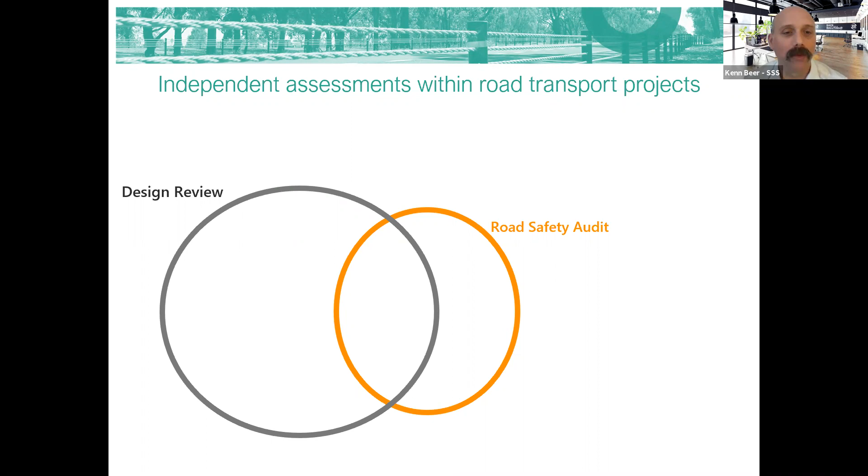The other thing that's important to remember, which is a really important injection of safety into a road transport project or an independent assessment of other features as well, is that design review. And there is overlap between the road safety audit and the design review, but there's certainly stuff in the design review which is not picked up in a road safety audit: conformance with different standards, checking, drainage calculations and all those wonderful things. And that's another important process. There is overlap there, and there's stuff that a road safety audit does that will probably not come into a design review.

And our safe system assessment, again, has overlapping parts. There is quite a bit of overlap between what you'd find in a road safety audit, what you'd report in a road safety audit, and a safe system assessment. But there are certainly things that a safe system assessment looks at and reports on that are not covered in a road safety audit. And you can see there that there's a little bit of design review stuff in there as well.

Then we've got safety in design. So that's one to check, can this be built safely? Can it be managed safely? Can it be decommissioned safely? So that's another beast, another independent assessment in there.

And then there's this sort of DDA compliance, the Disability Discrimination Act, checking the tactile ground surface indicators are in the right spot, the grades are right, and all of that sort of stuff. So there's quite a few of these independent assessments within road transport projects, and those are certainly embedded into your processes with any transport project at TMR.

And so I just thought I'd start with that to show some of the overlap, but also show some of these areas that are outside. And certainly one thing that I've found as I've been doing a lot of safe system assessing over the years is a lot of people say, well, we've done a road safety audit, so we don't need this safe system assessment. And well, you're covering off some of the stuff, but as you'll find out, there's a lot more to it.

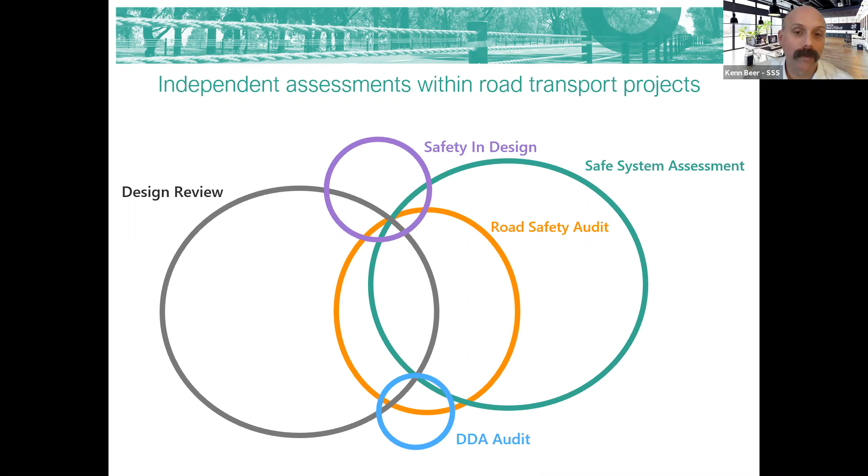Remember to jump in with your questions as we go, but that was just a little context setting slide I wanted to put up first. But really, we're jumping now into module 1, and I've got quite a few things to cover before I ask you some questions.

So by the end of this module, we want you to be able to list the principles and the elements or pillars of the safe system, determine kinetic energy thresholds for key crash types, explain the differences between traditional approaches to road safety and the safe system approach, cite best practice for behavioural change and vehicle interventions, and give reasons why speed is a critical element of the safe system.

So there's a fair bit to cover there, and some of those you might think, oh, well, I know that, but I may give it a different slant to the way it's been presented to you in the past. And I'm also keen to hear your thoughts on some of these and gather that information.

Okay, the safe system. This is a road safety philosophy, or actually an operational philosophy of a road network or transport system that we've committed to. We've committed to in state strategies or state policies, in national strategies, and even at a UN level, we committed to the implementation of the safe system. So we're in, TMR's in, absolutely committed to the implementation of the safe system.

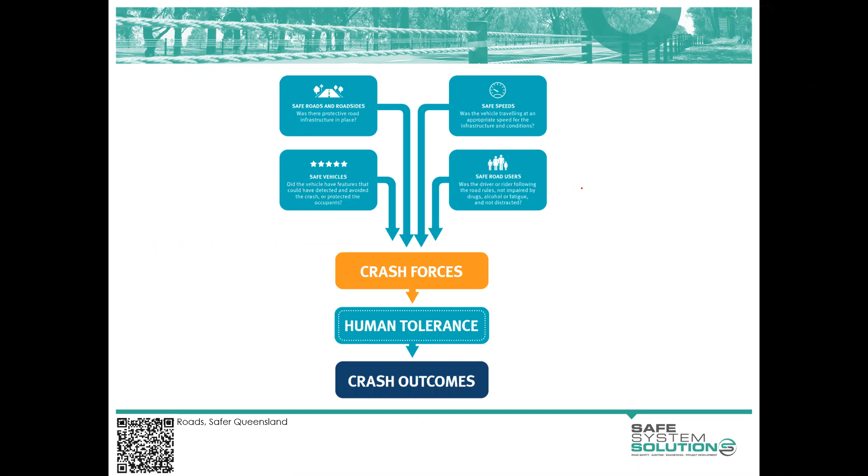The fifth element, the acknowledged fifth element of the SAFE system is post-crash care and emergency response. So how quickly and how efficiently we can get to injured parties in a road crash, how efficient and advanced is our medical system to treat them. And that's because you remember the diagram basically said fatalities and debilitating injuries.

There is your golden hour rule, and when you talk to the trauma surgeons, they're very adamant that if they can get there with early intervention, they can make things that would be acquired brain injuries into lesser and much lesser injuries that people can have a full and healthy life with. They can do some wonderful things. So we acknowledge that as an element of the SAFE system.

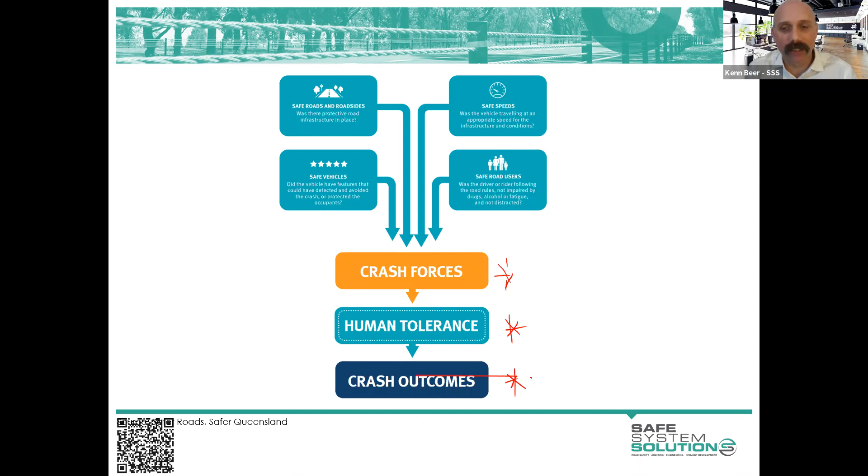This is another little diagram I love that came out of TMR, and it's just another representation of the SAFE system using those elements that feed into crash forces, human tolerance, crash outcome, right? And that's to say we've got this complex mix of things going on out there in our road network. And when an incident happens, we need to understand the forces. We need to check the forces against what the human body can handle. Then we know our crash outcome. And if the crash outcome is fatal or serious injury, like debilitating injury, we need to go back and look at these elements and say, hang on, we haven't got our system right.

So crash forces, and look at it. This is straight out of your documentation. Look at it. It's the orange. It's the bright color. Crash force. Not saying how do we stop crashes, but saying what are the forces in these crashes, and that is one of the most fundamental changes between the way we've traditionally operated in terms of road safety and how we're moving in the SAFE system, the acknowledgement of crash forces and human tolerance to physical force.

So we're going to do everything we can to try to minimize crashes. We're not ignoring that, absolutely not. But we are just acknowledging that we need to design our system for humans. And they're fallible and they're going to make mistakes. And we need some fail-safe mechanisms. So when people fall asleep at the wheel, or when they do things that we don't condone, don't want them to do, like use their mobile phone, or have a few beers and get in the car, or have a few beers and stagger out onto the road.

How is our system going to protect these people and others that are in that immediate area? And that's confronting, isn't it? Because you're saying, well, hang on a second, if these people can't behave themselves, why is it our responsibility to protect them? Well, the reason is you are managing a road network for society. And that is our responsibility. They have a responsibility as well to do the best they can, but it does not void us

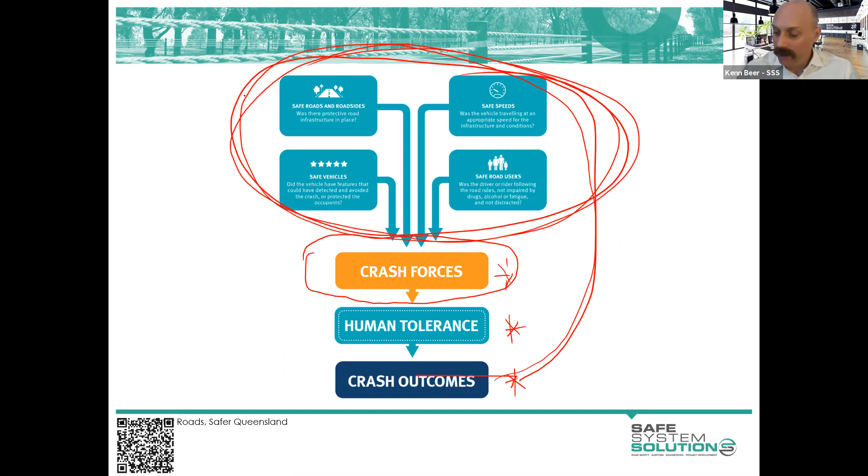So I wanted to use a different analogy on this. And I want to get out of the transport field for a second, because we've grown up with roads. We've grown up walking and then riding or whatever you're doing, and then driving around these networks, and then managing it, designing it, maintaining it, whatever your role is. And we've sort of developed in our mind a safety culture, the way that we think about safety and roads.

But if we look at another industry and we try to say, well, what is their safety culture and how have they got there? I think it sort of opens up our mind to reassessing how we've established our thoughts on transport. So let's look at manufacturing. Let's look at widget production. I don't know what widgets they are. They're widgets.

There was a time back there in the early days, and this is where the widget factory was actually a fairly open system. Because immediately when I say widget production, people just go, yeah, it's a closed system. There's so much freedom out there on the road network and people accessing it all the time. This is not a good comparison.

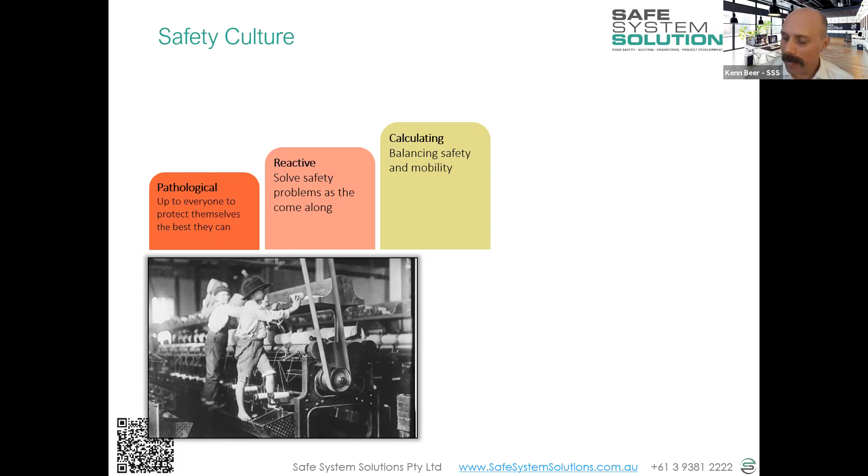And then it sort of elevates from there to this idea that safety sets the precondition for widget production, in terms of saying that we need an extremely high level of safety, and we will produce as many widgets as we can up to that level of safety. But that is dictating. And it's very accepted in occupational health and safety in factories and the like, an absolute zero for death and serious injury, right? And people are like, yep, absolutely, right?

And the safety culture is such that it says, if there is something that poses a potential death or serious injury, production stops, right? And they say, we have to fix that before we restart our widget production. And so we see the machines, and they have cutoff switches and guards and all sorts of things beyond simply the training of the people using the machines. It's quite a sophisticated safety culture system in most of our factories in Australia, at least. Some of the rest of the world still has some work to do.

But you can't stop there. You need to continually invest in maintaining that high level of safety, the culture in terms of the facilities, but also the people and the machines and the like. So that's sort of the safety culture in the widget production sense. But safety culture is safety culture across the board. So this applies equally to our road transport system in the design, the development, the delivery and the management of our transport system, our road system.

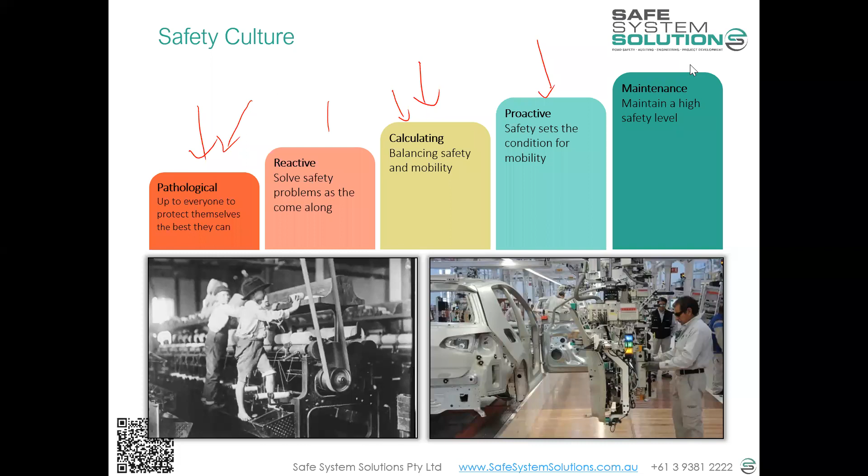Thank you, Kenn. We've got 100% of people have voted in the poll. So that's great news because that means it's working and everyone's here. So I'm not sure if you can see that. Can you see that? I can see it. Okay, great. And I assume everybody can see it.

robots or the like. Well, maybe that's another area, but for pretty much all of our careers, we'll be still dealing with humans in control of the system. And what we want to do is manage mistakes, minimize and manage. No mistakes is just not an aim of the SAFE system, because it's not real.

We'd love no deaths or serious injuries, and in fact, that is an aspiration under the SAFE system, and we're aiming at that. We know the human tolerance to physical force is a key principle. We know that people make mistakes, and we've got to factor that into our design, decision making, our operational decision making, and there is a shared responsibility which we're looking at.

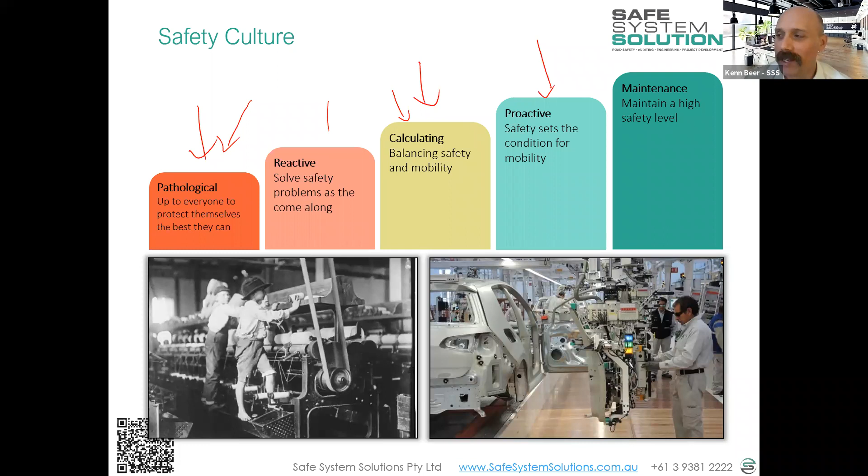There's Usain Bolt, the Hulk of a human. He's up there because this is our total population, and that's his running speed. So there's just a little bit of an indication of, you know, pick any of us mere mortals up, and we'd be less likely to survive crashing at that 44 kilometers an hour than Usain Bolt would.

There's a little video I've popped in there of the guy hitting the pommel horse. It's in your memory stick, and it's on Moodle, so you can have a look at that. He survives, but that's the kind of forces that we can handle. I'm going to jump on from that.

We also have this data not just for those pedestrian crashes, but we have this information for some other crash types. So this one is a right angle crash. You know, common people would call it a T-bone crash. But we have this vehicle here is what we call the bullet vehicle. The one that does the striking is the bullet vehicle, does the damage. In this case, this is the target vehicle. The target vehicle is the one that gets struck, or the occupants that receive the damage.

Now, this graph is the speed of the bullet vehicle and the injury or death probability to the occupant of the target vehicle. And we see there that around the 40 kilometers per hour of bullet vehicle speed, it's very likely that the occupant will survive. Up around the 80 kilometers per hour, we're in the territory of highly likely to result in fatality to the occupant of the target vehicle, sorry, I should say. And around the 50 kilometers per hour is where it really starts to exponentially kick up.

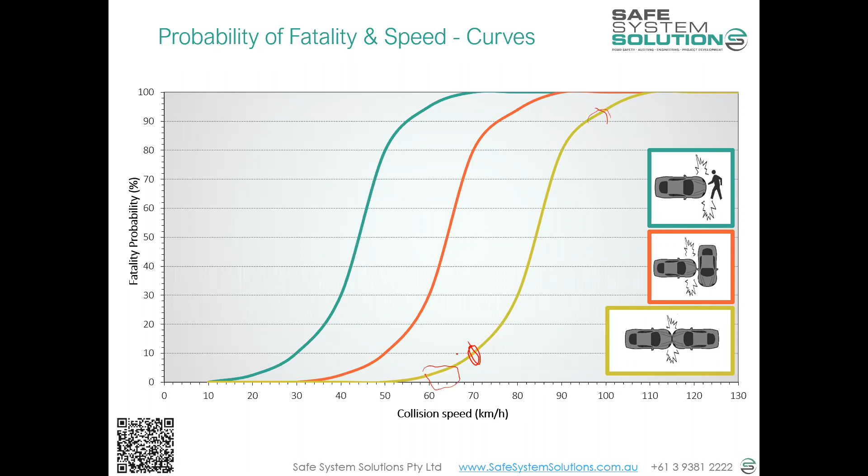We certainly can, Kenn. A question came through: is the collision speed the total of both participants or the speed of each? So the collision speed, in the head-on, it's just the speed of each. So there would be 70 and 70. And this one is the bullet vehicle speed only. So this vehicle could be coming out of an intersection or something quite slowly, or could be going along quite fast, but it's that instantaneous hit. Now, there are some complex vectors associated with this, and it slightly varies a few things. But in general, that's what it is. So that's a good question, though.

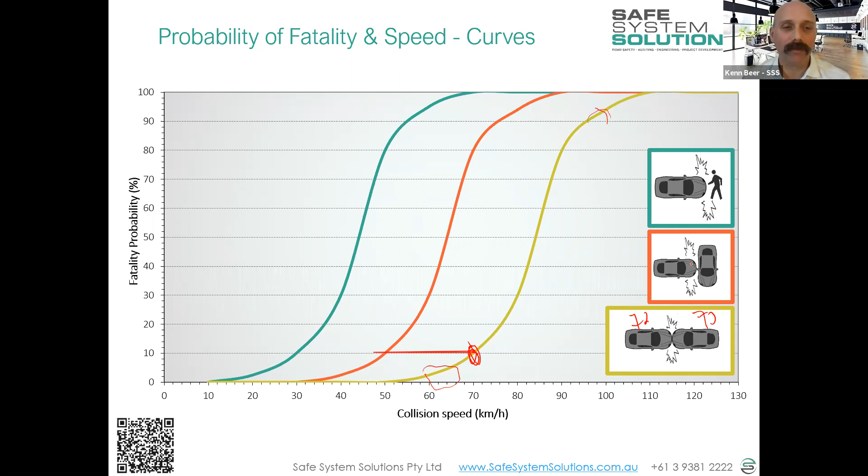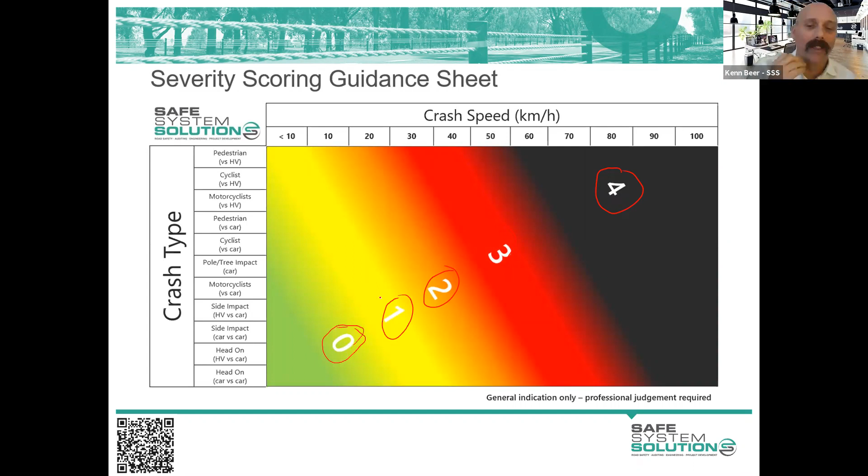That's sort of how it graduates up. And in fact, we use these numbers in a scoring system within a safe system assessment. So you'll probably, I hope, be referring back to this and saying, I'm worried about a car side impacting with another car at 40 kilometers per hour. What sort of severity score should I give this?

And you could say, well, side impact car to car, so come up here and somewhere. Okay, we're talking 3. So, not in the absolute end, and there will be some of them that will be survivable, but there's still potential for some pretty serious stuff there.

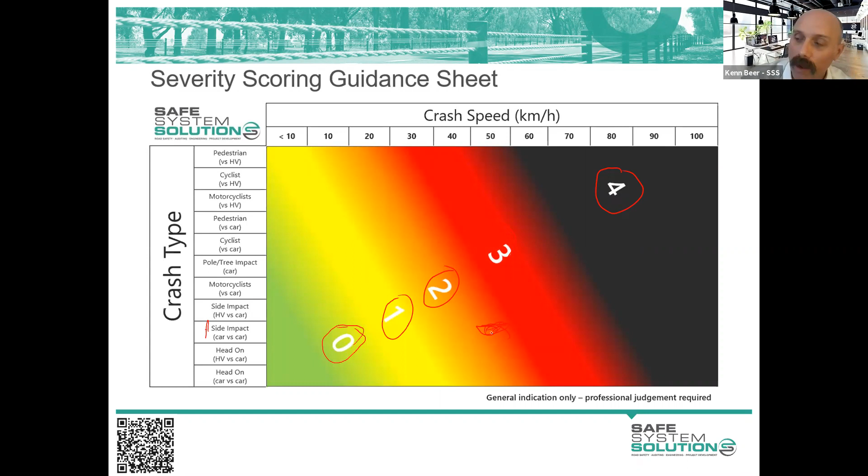All right, I'm going to keep moving on, Kathy. But good, thank you for these questions. It's really great, and getting involved in these different things that are coming up.

And these crash causation studies are done almost like clockwork. Every 10 years, there's a new crash causation study done around the world that's the world's biggest crash causation study. So they're taking 5,000, 10,000 crashes and analyzing them, and they go, this is the cause of these crashes.

And they pretty much always come back with somewhere in the order of around 90% of the cause of crashes is road user error: driver error, pedestrian error, motorcyclist error. Then we've got the roads playing a role in interacting with that sometimes, or the road being the actual feature that's been the major cause of this crash, vehicles even smaller than that.

Now, the reason this is the bane of my existence is not because it's wrong. I don't dispute any of this research. I think it's very sound research, well done, comprehensive, massive studies. The issue I have with it is where people take this information, and it reinforces to people that we should be fixing the road user.

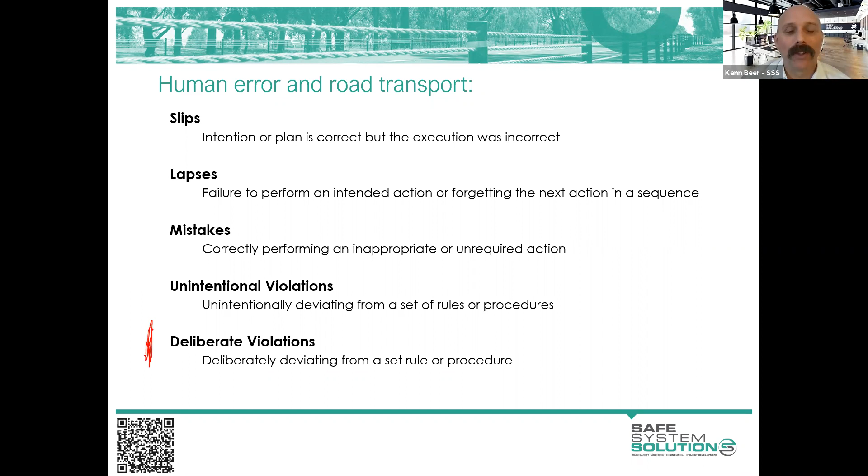All right, enough out of me, Kathy. Let's do a little exercise. Yes, please, Kenn. We've got about 40 minutes to go.

All right, so the poll should be popping up on your screen, and what we're doing is a mix and match here. Basically, we're saying the traditional way of thinking, before the Safe System, was victim blaming, and what we're trying to move to is one of these other ones. Now, some of them could go to any one of these. But if you scroll down through the questions, you'll be able to get a few quickly and answer the others. What we're looking at is how we have traditionally approached road safety, and where we are moving to with this idea of the Safe System. What are we trying to achieve? Not to say we're there yet. We've got a lot of work to do, and it's going to take big change.

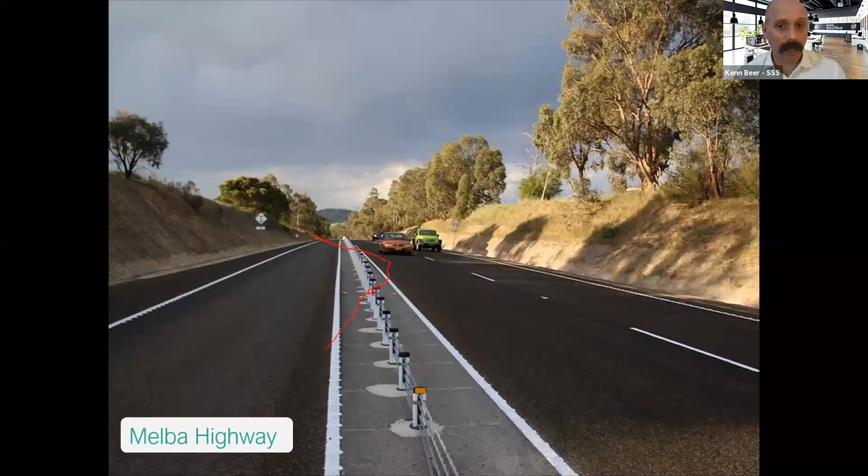So those of you who know a wire rope system and how it operates, a vehicle hits the wire rope and the wire rope posts break away, and the wire ropes absorb the energy and bring the vehicle back. And we know that there's a deflection zone behind those, and we make sure we've accounted for that within the design of the barrier system. Now this one, as you can see, in a cutting, some challenges there in terms of widths and how this all plays out. And the median width there varied, went down to 1.4 at some spots, and it's 2 metre or 2.2 at a lot of other spots. But nonetheless, certainly we know the wire rope would deflect into that oncoming lane a bit.

Now, that then, I reckon it added at least a year, if not more, to this project as the design committees debated this. Well, it doesn't meet the requirements, and people were very adamant: standards say this, must be this, we don't have the deflection zone, can't do it. And then a lot of us in there going, well, our options here are to blast out or cut this batter back or compromise other areas. And there was quite a risk analysis done and all sorts of things.

But what happened is that people couldn't see that the barrier system, even operating a little bit less, like deflecting a little bit into that lane, is so much better than just a white line, which is currently what was there.

And that we should be trying to eliminate as much of the risk as we possibly can. The reason I bring it up is this sort of reverting back to a standard without stepping back and looking at the overall safety of this.

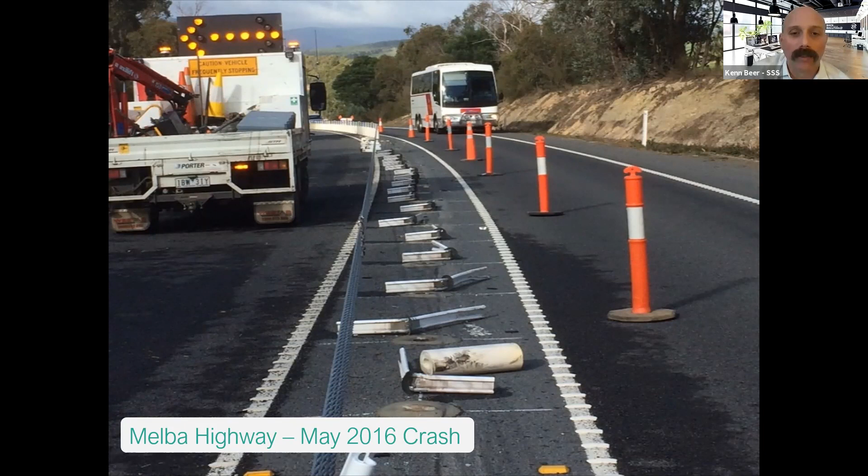Yeah, so certainly you'd eliminate your deflection issues with a concrete barrier, an F-type or the like. The severity to the vehicle occupants would be much worse. So we get around a 40% reduction in fatal and serious injuries with the implementation of a concrete barrier system, and we get about an 85% reduction with a wire rope safety barrier system.

The reason for that is, people probably have this vision of people crashing into the barrier systems as they drift off, and they hit it at a nice shallow angle. The mechanics of a crash are actually, well, a lot of crashes are a lot worse than that. There are some that do that. A lot of crashes are people leaving the road to the left, overcorrecting, and shooting at a pretty harsh angle at the barrier. So the flexibility of that barrier system becomes integral to the severity outcome to the occupants of the vehicle. And hitting a concrete barrier, the severity is much worse.

The cost would be more as well, probably, for the concrete system, but you would avoid some of those other challenges. But good point, and there are situations where you would use concrete, absolutely.

Okay, I'd like one last question. Did the operating speed change? That's a good question. I would have to relook at that. I would imagine it did. It came down a little bit. It has in other circumstances where you put something in that closes that envelope of a road, narrows it down. You traditionally see a lowering in operating speed, but I can't hand on heart say for this road that it actually occurred. But yeah, they're great questions, Kathy.

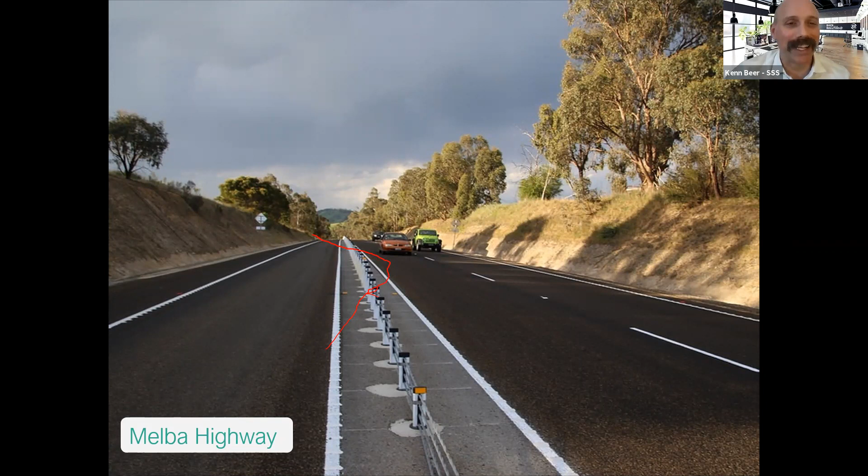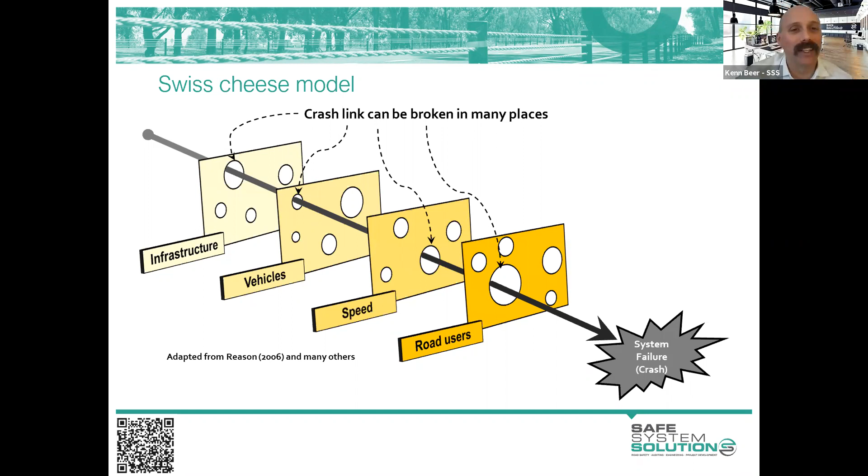All right, I'm gonna go a bit fast here, so put your seatbelts on. I'm gonna just cover off a few things in safer road users, safer vehicles, and safer speeds. Speed's something that's going to be continuing on throughout all of our modules. Road users and vehicles, really, we don't have a huge amount to discuss after today's module.

But the reason I want to do that is twofold. One being that road safety practitioners, or people even just managing a road network or being involved in that, should have an understanding of some of those other behavioural aspects, so when you're at the barbecue and you're talking to people and they find out you work for a road authority, you can dispel a few myths. But also within a safe system assessment, if you're doing full safe system assessments, you are not just looking at the speeds and the infrastructure.

You're also looking further and broader than that, associated with things to do with behaviour change interventions and vehicle safety interventions and those sorts of things. We'll get into that later. But I want to talk briefly about some of the things we know work. So education, encouragement, enforcement, and the licensing systems we put in place. So graduated licensing system is generally the way we talk about it.

We know that education plays a foundational role in how people operate around the road system, and it can provide value. So I say it's very hard to change humans. It is. It can take generations often, but it also takes lifetimes. But we do know that kids are the most open to behaviour change education. They're also very good conduits to getting to the parents in terms of some road safety behaviours like using seatbelts. They'll tell their parents to put their seatbelt on, if you can instill that that's an important thing to do in the car.

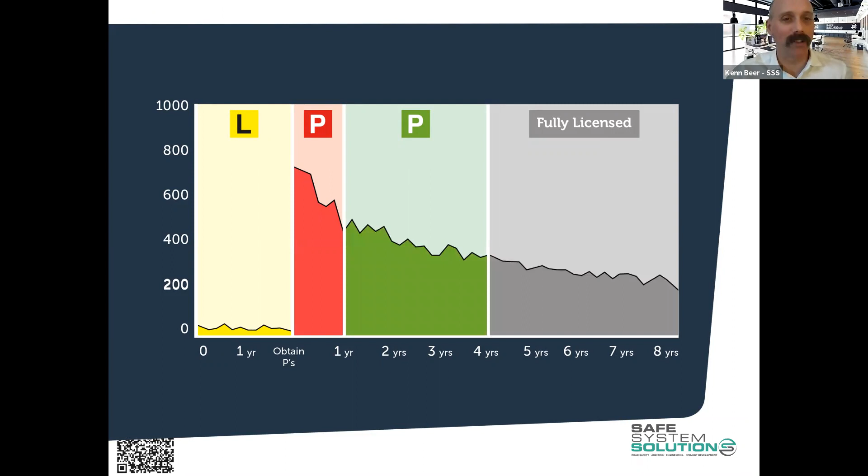Learner drivers are generally pretty safe. As soon as they're out there driving by themselves, the risk goes off the charts, and it comes down over time but never actually gets back to as safe as a learner driver, which shows your skills aren't a major factor. I mean, they are a little bit of a factor, but not a major factor. If we can incentivize people to drive safely, it seems to have some resonance. So pay them to drive safely, in a sense: give them a free license if they have no demerit points after 10 years or something.

Advertising a particular behaviour is far better than just saying drive safely. Tell them to rest every 2 hours or something, rather than fatigue kills, drive safely. Give them the action, and changing a culture is what we're trying to do, which I'll talk a lot more about. I'm going to jump through these, Kathy, because I need to get to a few things at the end. Enforcement's still a really important part of road safety, but it is just a platform, not what we're really building off. It's strategic, specific, and general deterrence and visual presence.

The speed cameras work, and they do a good job in getting things within some limits that we've obviously set. And the vehicle technology is really accelerating well now, where your vehicles can regulate things like alcohol in the system and not let the car go, or regulate speed, or tell you what speed zone you're in and not let you go over that speed. The technology's there. Do we have the political will to enforce these on people? Often not.

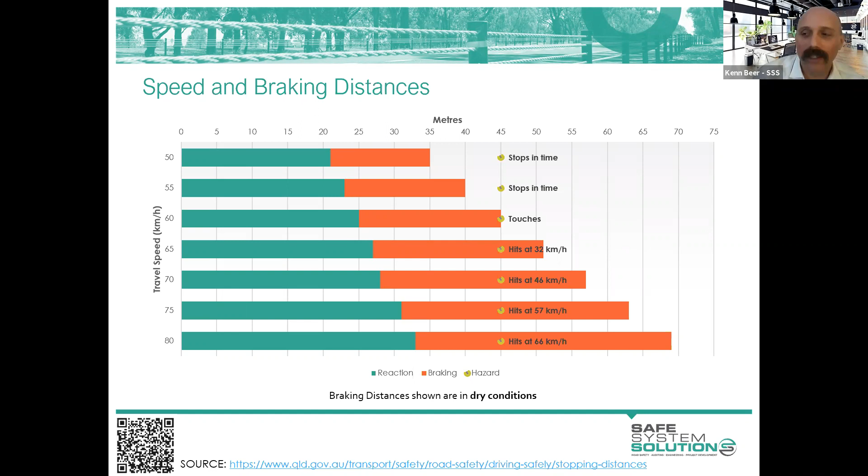It's not linear. And in fact, we know that it's a fourth power relationship for fatal crashes and speed changes, and it's a third power relationship for serious injury and speed changes. So small changes in speed actually play out as really big impacts on the amount of death or serious injury. And the higher the severity, the more it's influenced by speed.

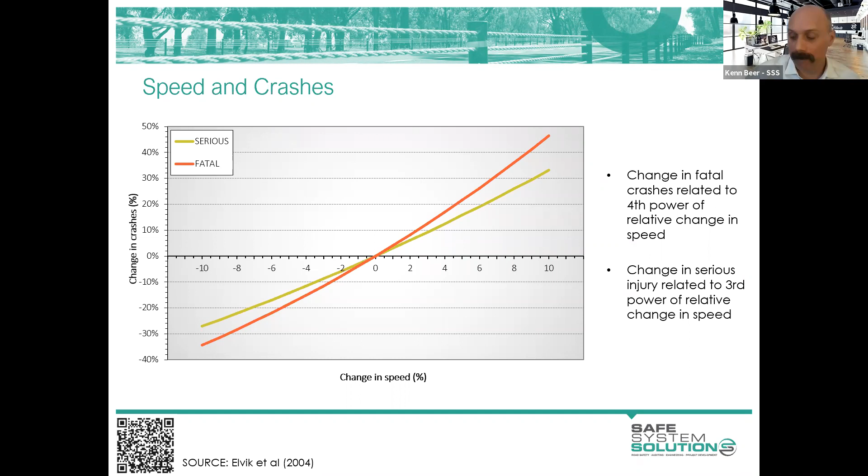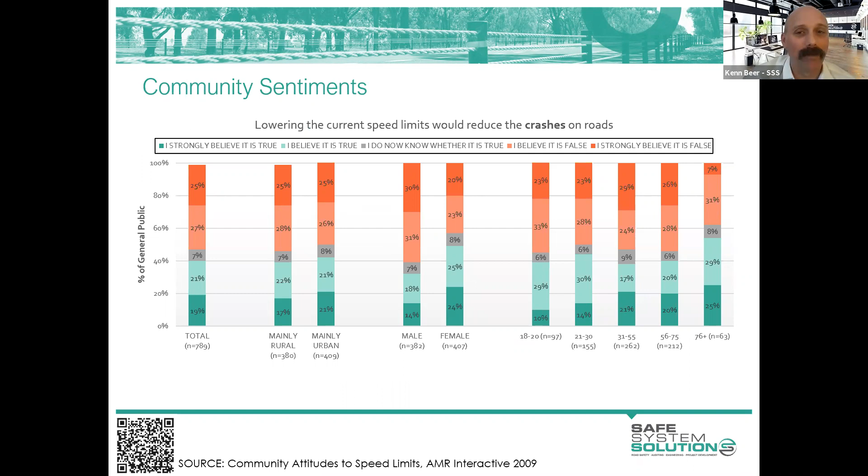The public, not so convinced, and we need to work on that. And I'll let you look back at some of this sort of stuff. A lot of the public out there don't believe that speed is the major player in road safety, and that it's all the driver behavior stuff that needs to be worked on.

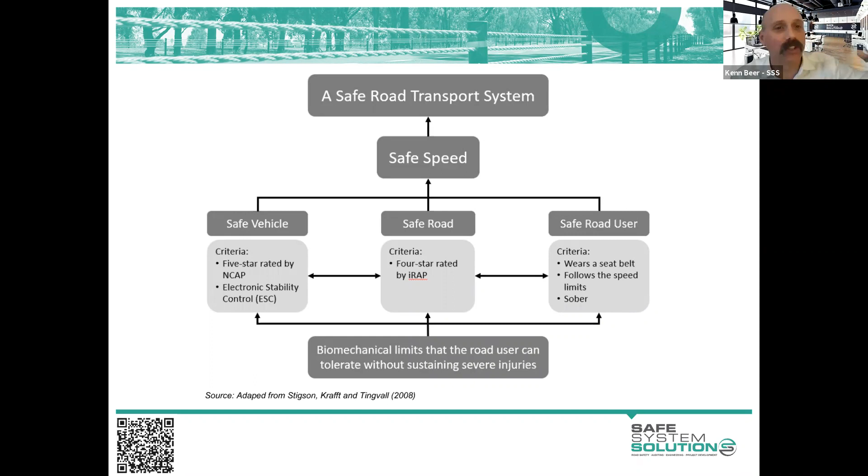And we get safe speed through infrastructure and or speed limits. Don't get focused just on that speed limit, but we've got infrastructure to play with and the vehicles and other things. Explaining why a speed limit is in place can assist. So whether it's a school or telling them that there's no emergency stopping lane actually helps in the acceptance and compliance. And protection of vulnerable road users is generally well accepted. I'll talk you through a couple of other things later on speed.

But in the safe system, risk generally has been likelihood times consequence. What is the chance that a crash is going to happen? And how bad is it going to be? For the safe system and a safe system assessment, we add exposure. How many vehicles are exposed to that crash? How many pedestrians are exposed to that? What's the chance that that crash is going to happen? And then how bad is it going to be when it does happen? And what you do in a safe system is analyze each of these elements, and you quantify them and you score them.

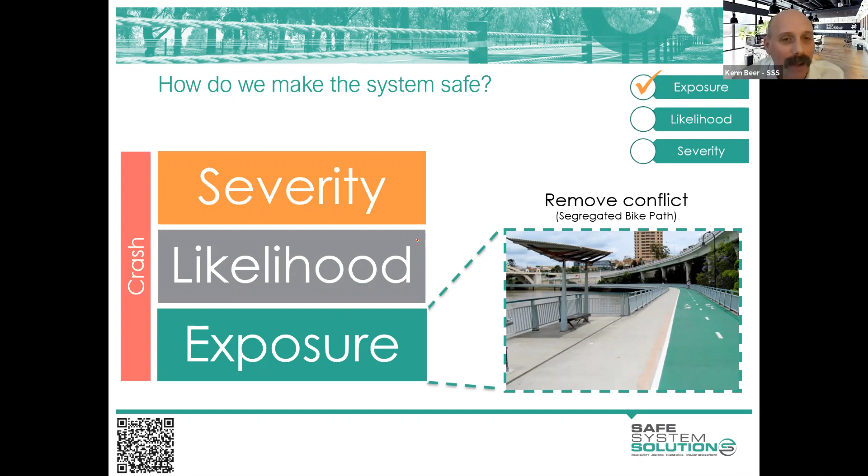And so exposure can be things like blocking off roads, not letting people access areas like this one. They're not letting them access a level crossing there, or separating completely. So the vulnerable road users are not on the road, they're completely separated. Then the exposure to vehicle crashes has been eliminated.

The likelihood is what we've covered traditionally in road safety: sealed shoulders, line marking, audio tactile, signs, traffic signals. All those things are trying to stop crashes happening. And they're great. That is so important, and we're going to continue to do it, right? Traffic signals, great example. Let's try and stop those crashes happening. But they do nothing for the severity of the crashes when somebody runs the red light, completely misses it.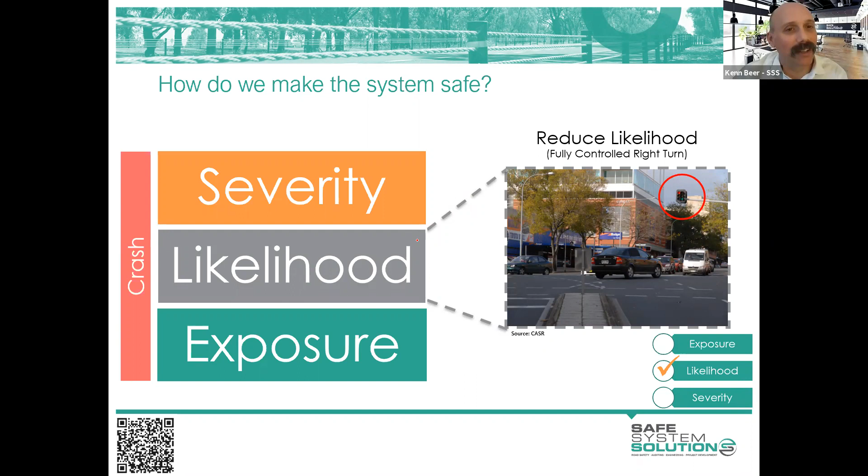Now, I've raced at the end there, but I'll just give you this last thing. I've been road safety auditing for 20 years or something like that, and safe system assessing only for the last 5 or 6 years, really. The biggest difference to me is that I used to look around the road network all the time as I was driving, walking, or doing audits. And I would have this vision of what is influencing a crash to happen? Or there's a see-through effect, or the sight distance is blocked there, or all of these things.

Now I still do that, but I'm more and more dominated by what is the potential energy here. So I'm thinking, what are the speeds? What are the angles? What are the barrier systems? What is the energy sitting in this bit of road or this intersection when mistakes happen? Not if, when. And that is a critical element of the safe system that we have never really put our attention to. And that's what we're going to be taking you through a lot next week. So we're in the space of energy management these days.